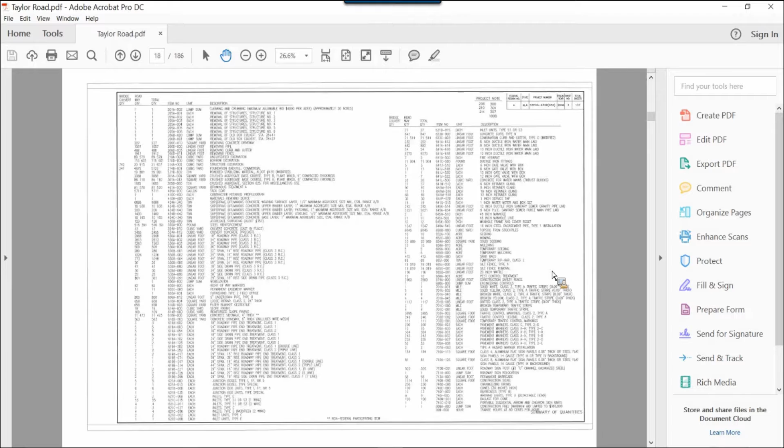I sort of thought about this earlier and kind of realized, we are in the business of communicating, documenting, and conveying design intent. That's what we do as engineers and as designers. All of the sets of plans that we have created and continue to create convey and inform someone else of the intended design. So as we ask ourselves, what is design intent?

If we look at a set of plans, any set of drawings, for a typical section here, for example. So as we zoom in and we take a look at this typical section, it is conveying design intent. And it's conveying design intent really a couple of ways. One is that it is conveying our intent for this particular cross-section or typical section of this roadway. It's conveying it in a relational way.

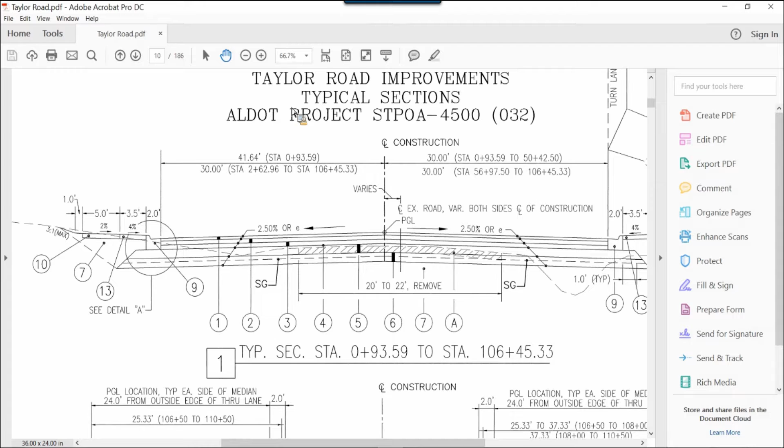It's basically telling us, hey, this edge of pavement is going to be 30 feet from this center line. That's the relationship horizontally that we need to maintain from the center line of this roadway. And at the same time, it's also defining positional definition. If we zoom out, let me scroll down here, bear with me.

We'll move down. If we look at any typical drawing within a plan set, we look at a plan and profile, let's zoom in here. It's also defining, again, locational or positional definition. For example, here we just got a simple call out, station, and offset of that particular right-of-way point.

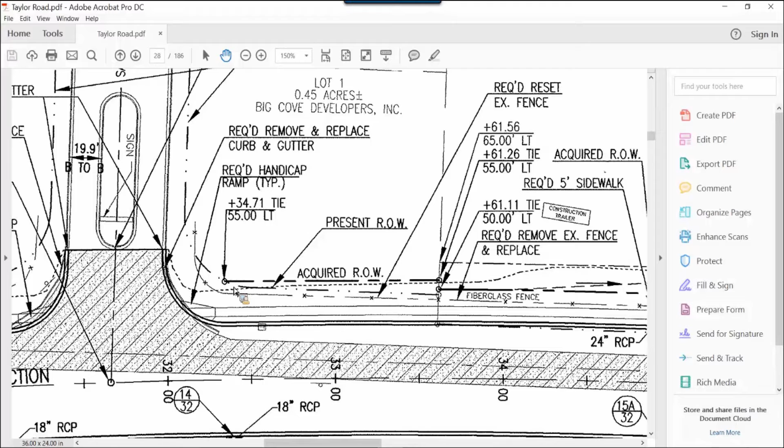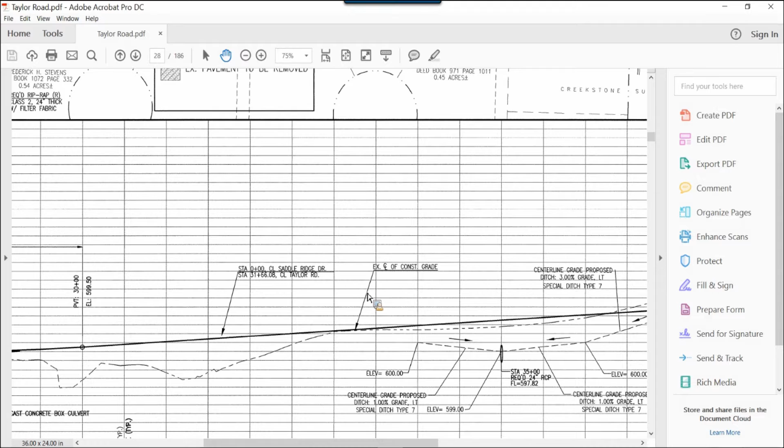Again, when we place a lot of this information in our plans and how we define elements and the way we do things, it's all about position and it's all about relation. You want me to build what, where, in my simplistic terminology. So when we think about design intent in the form of the plans and the way we've conveyed it in the past, it does sort of come down to relational awareness and rules that define where something is and how it interacts with other elements.

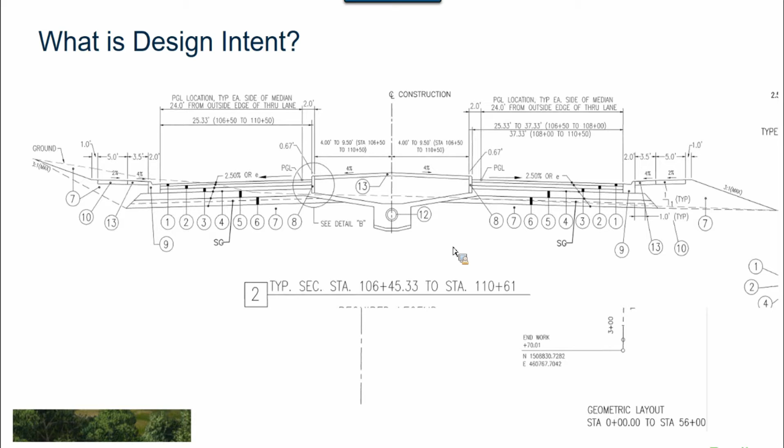Now, what does that have to do with OpenRoads Designer? Well, OpenRoads Designer takes that thought process and really that fundamental concept of everything that we do when it comes to defining our projects and setting the scope, and defining that intent for each and every design. It takes that type of mentality and places it within the software.

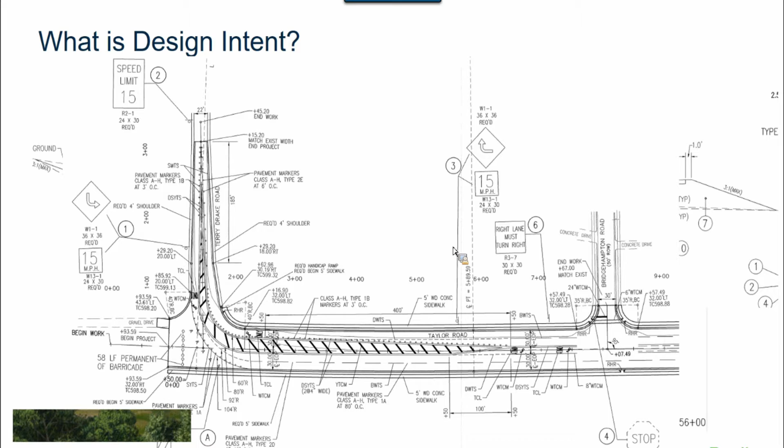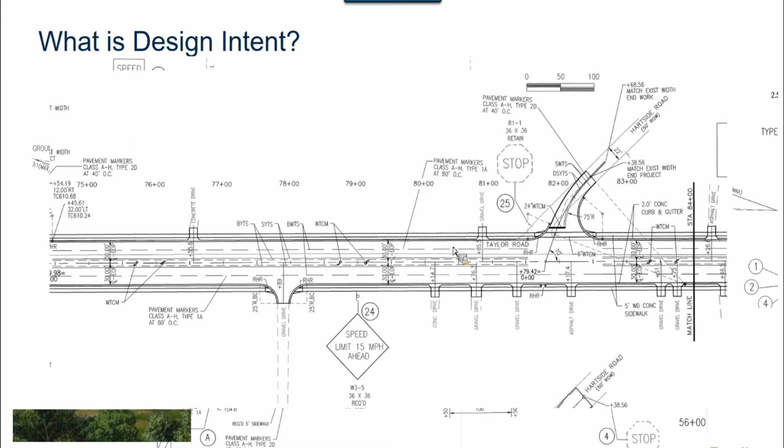And it gives us the ability to define elements and build rules and relationships directly into our elements as we design. So as we create graphical elements with an offset of 12 feet or 24 feet, or we create a radius of an element of 150 feet, it remembers what it was and how you created it. Now the impact of that has some distinct implications. So why should I care that elements within my design model remember how they were created?

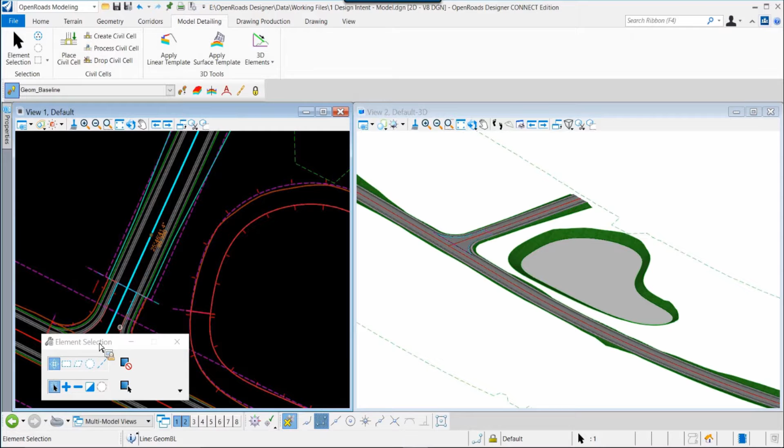Well, there's a couple of things to note. And here's just an overall example. So within OpenRoads Designer, and you may have seen these types of demonstrations before, here's a basic T intersection with a little short stub out of a roadway. Now, in OpenRoads Designer, as we move elements around, you'll notice that the model, the graphics, all of the interconnected elements move with it.

So as I need to just modify that intersection, and I slide it up along the mainline corridor, you'll note that everything's going to move and change with it. Now, simply being able to do that is a result of rules and relationships, of OpenRoads Designer remembering how I created the horizontal alignment for this secondary road. It remembers, of course, what roadway template was applied to it. It would remember how the vertical alignment has been created.

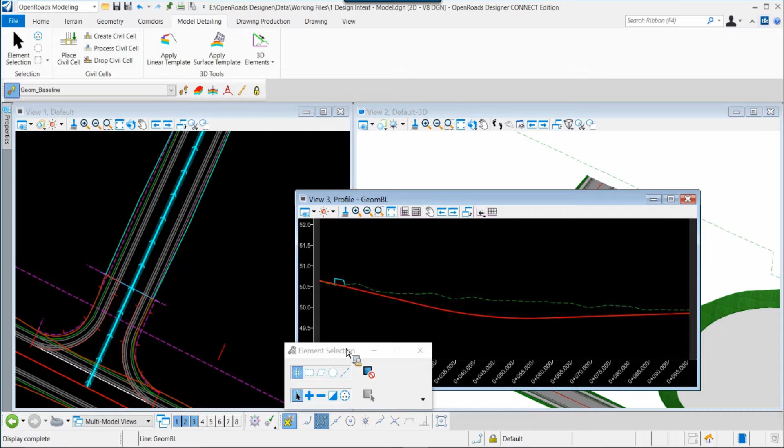So, for example, if I open up the profile of this secondary road, and bear with me while I rearrange the views just a little bit here. Now, these are the subtle details that we all are concerned about. The devil's in the details. And so, for example, it's one thing to just move this intersection up or down, but I need to be aware. I need to know that my intent is maintained when I make modifications in my design.

And that fundamentally is the benefit of having, quote, design intent, or capturing and storing rules and relationships all the way through your design process, which OpenRoads Designer provides you, is that you can be confident, you can know that I created it this way, it's going to maintain that relationship until I change it, even when I jiggle something to the left or the right or north or south of it.

So in this example, I moved that road, we saw the model update, but you may ask yourself, well, wait a minute, there's some details to that. What happened to the vertical? How did the profile know what to do? How did it know how to maintain a certain slope or a certain cross slope, or how did it tie into the roadway? So first of all, as you talk about design intent, every element in OpenRoads, as you create it through the OpenRoads tools, has some form of design intent.

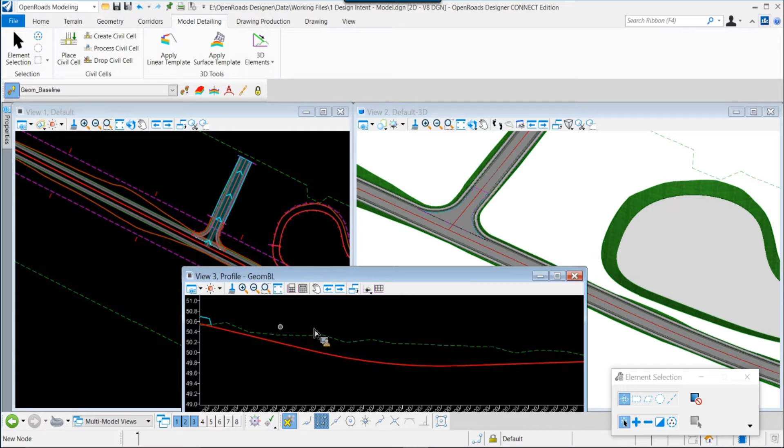Now that design intent could be a slope, 2.26%. It could be a horizontal distance. It could be a direction, north 45 degrees east, whatever. It could be a snap. It could be that I have singularly and definitively snapped the end of this line to this point, and it remembers that, okay? But in this example, notice what happens in the profile view as I just grab the horizontal, and let me just move it along the roadway and stop for a second.

So when we look at the details, specifically the profile details of this, you'll notice that that profile has a defined relationship to, number one, the mainline corridor and the cross slope of the mainline corridor. Notice how as I move that along the main line, that profile knows to match the cross slope of the roadway. Okay? And that is fundamentally what design intent gives us, and the ability to do that.

Okay? So in a nutshell, or at least a straightforward, simplistic, direct example, move that down, let's pull that up there. That is the benefit and the advantage when we say design intent. What we are fundamentally meaning is that I have designed horizontal, vertical, three-dimensional, all of my elements within my OpenRoads model have been defined with rules and relationships, so that as I make modifications, those rules and relationships are maintained.

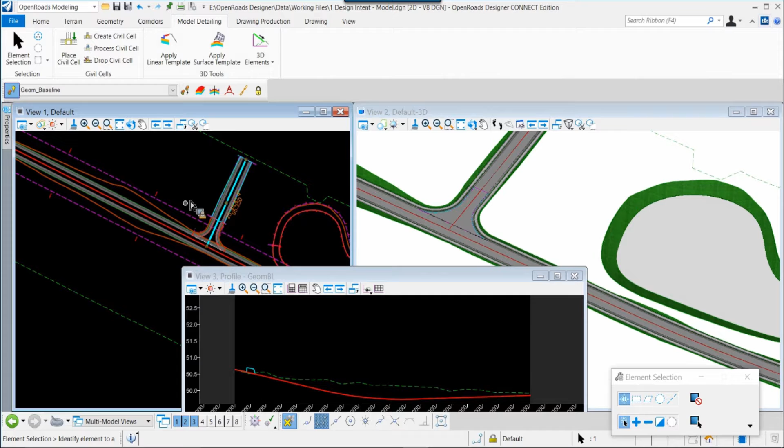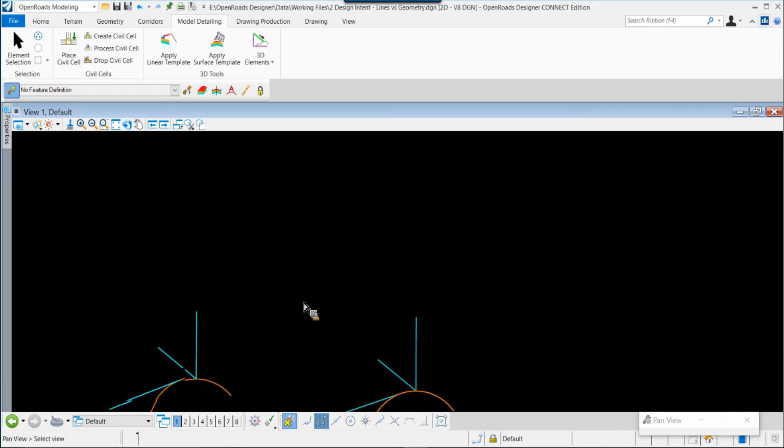All right, so let's take a look. There's a few other questions. If this is what design intent is, how do I implement it? What really is going on there? So bear with me. Let me change drawings here. Now, what I want to do first of all is to just give you a quick comparison to the way we have traditionally done things, and compare that to taking advantage of OpenRoads rules-based geometry.

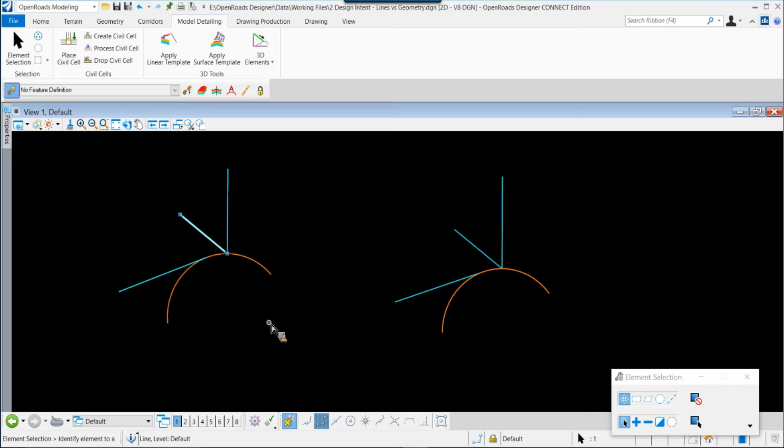Now, this is a bit of a strange drawing, I'll admit that. On the left-hand side, we have nothing but just some graphics. These are simply lines placed using our drawing tools. And you'll notice they have no real information on them other than a beginning and an end point. So there is a distinct difference between OpenRoads geometry and just graphics placed in a file.

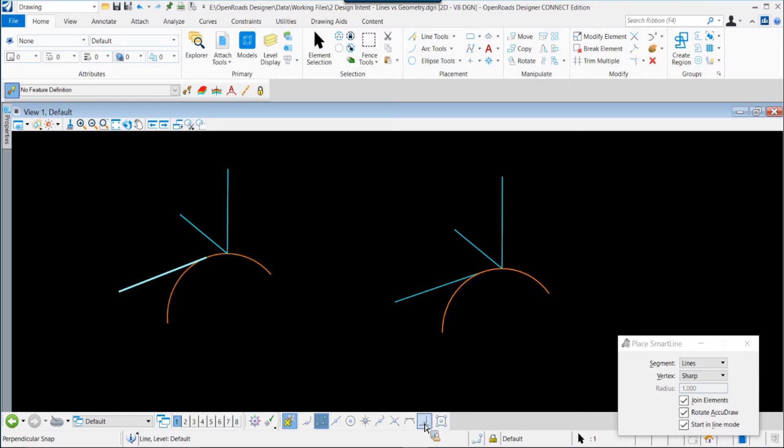So as a quick example, if I want to just place a line, and we'll do something very simple, and you probably have all seen this if you joined in the other presentations here. I can turn on, I'll do a perpendicular snap, and just place a line.

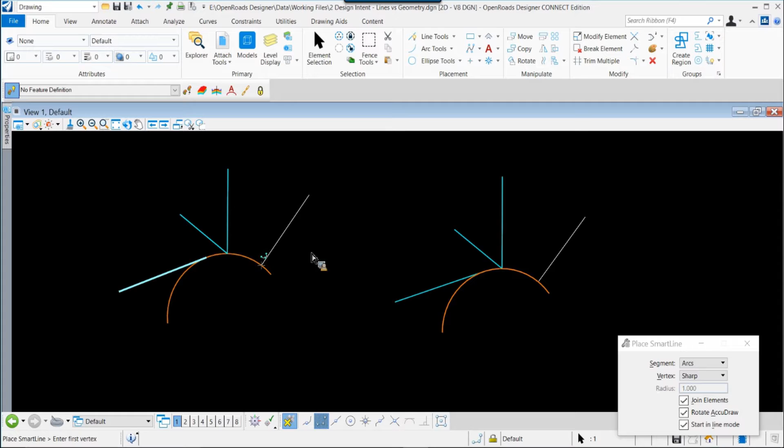Okay? And I can do the same, let's just do the same over here. Right? Now, we have that line. It's there. It was placed perpendicularly to this arc. But now what happens when that arc is modified? Nothing. That line that I placed has no relationship to that arc other than what I defined when I placed it at that moment. It has no legitimate ability to update.

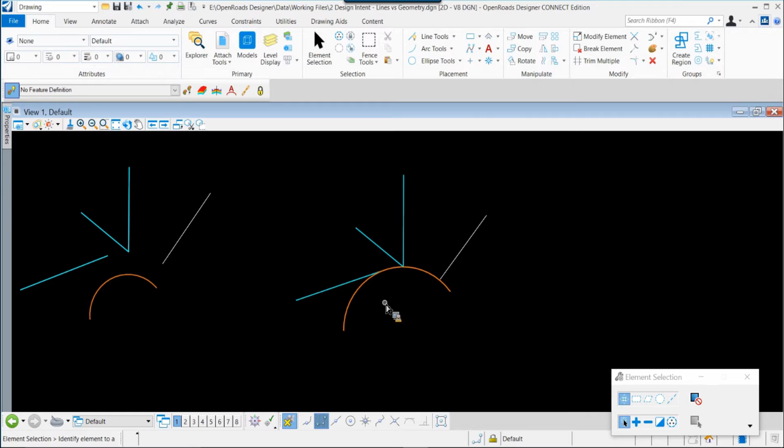And that's what design intent is intended for. It is intended to define and give you a mechanism so that all updates have a legitimate, definable and precise way that they update. So let's look at this other example. This is geometry created using the OpenRoads geometry tools. So we have the same drawing, the same graphical elements over here on the right-hand side.

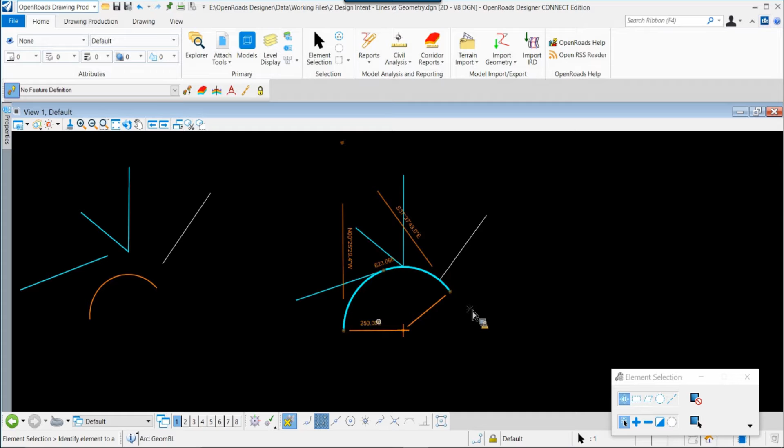You notice as I select that element, it is defined. There's a radius on it. There's a bearing, a distance. You know, the geometry is defined. So you could define this as line work on the left, geometry on the right. And the geometry on the right has rules and relationships to it.

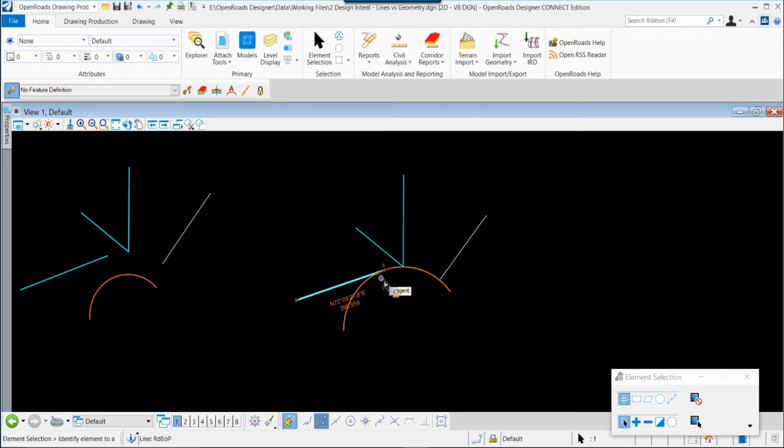Now, as I select that horizontal element, you notice a couple of things. We see the bearing, we see the distance. You'll also see this little glyph here, noting that that element was created with a tangential definition to that arc. And the same is true of all these other elements. There was a relational definition built into those elements when they were created.

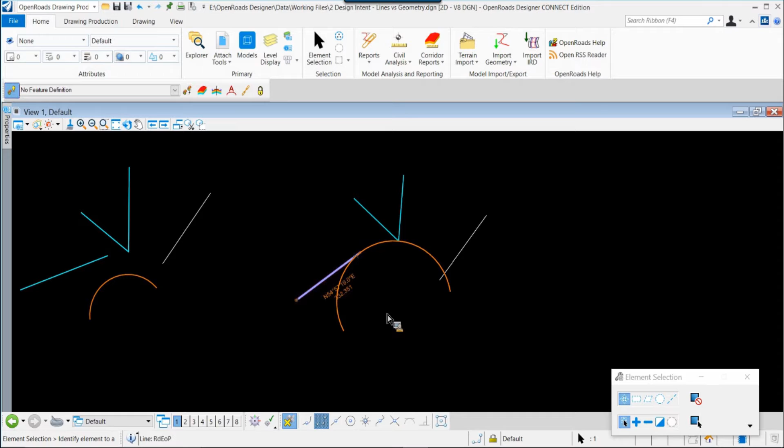Now, what's the advantage of that? The advantage of that is, very simply, if I make a modification, notice what happens to those graphics. As I make modifications to any of those elements, those relationships are maintained. You'll notice if I click on it, it's still tangent to the arc. This element's still perpendicular to the arc. And this element still maintains a 200-foot offset from that intersection point.

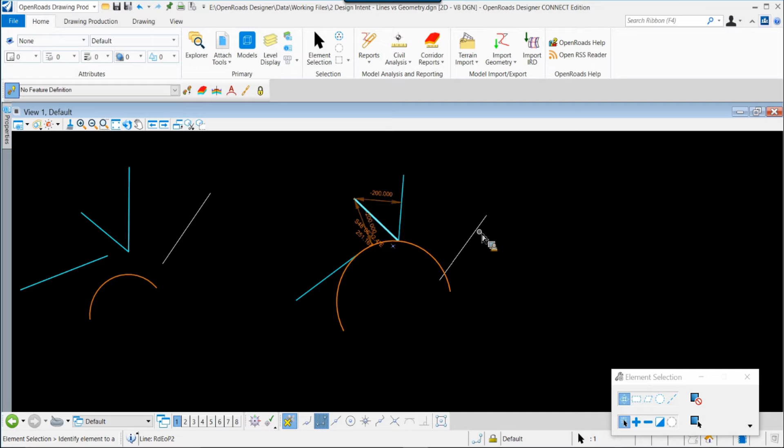And that, again, is the advantage, and that's fundamentally what design intent and rules and relational geometry in OpenRoads Designer is all about. It's to give you control as a designer to know that I made a change, I created it this way, it remembered how I created it, and I can maintain those relationships. All right? So that's kind of the difference between line work versus geometry.

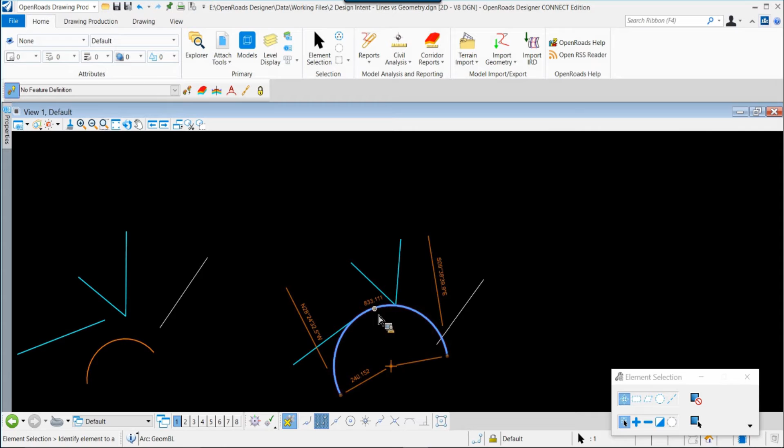Now, I'm going to take this a step farther here and just evolve a little bit. The benefit of having design intent is clearly seen graphically. It's easy to see that if I move this around, I see the line work update and the lines change. Okay? Imagine now we take that a step farther and we think about drawing and modeling.

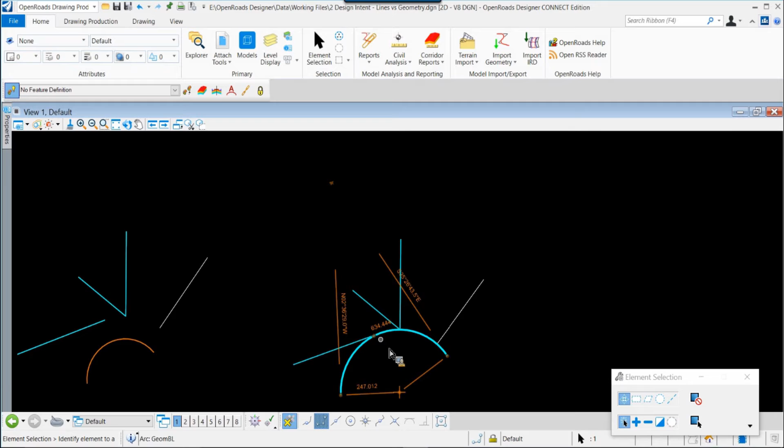So the geometry, an intelligent geometry, which is the foundation from which we're going to model, if that's intelligent and relational and rules-based, makes our modeling and making changes and designing within a model much more effective, right? So ultimately, the geometry, horizontally and vertically, and the relational interaction of that data is fundamentally how OpenRoads Designer knows how to dynamically model, change and update things.

All right, so a couple of points I wanted to make as well. Let me change back here so I can give you a couple of points I want to make. Now, I want to expand our definition of rules and relationships here a little bit. Inside of OpenRoads Designer, rules and relationships are captured and maintained throughout OpenRoads Designer.

Now, we're looking at geometry at this point, but the same is true in the horizontal geometry and vertical geometry. Your design intent is captured and conveyed in a roadway template with the cross slopes that you define, the depth of the ditch that you define, the elevation where you go to a 2-to-1 slope when the fill's elevation's too high. All of that is design intent, and it all combines and intersects within an OpenRoads Designer model to give you the dynamic modeling that we see.

Now, rules and relationships. How can rules and relationships be created and stored when it comes to creating my design model and my geometry or anything else in OpenRoads Designer?

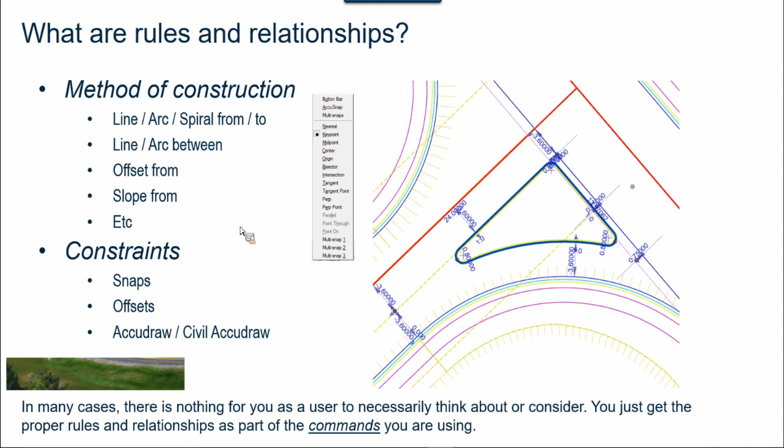Well, you can see graphically here on the screen when we use the geometry commands in OpenRoads Designer, we will be creating rules and relationships on elements as we create them. So the first method for imparting rules or relationships into your OpenRoads design is simply using OpenRoads tools. And we'll take a look at that in just a second.

But I boiled this down to three main ways that rules and relationships are created when it comes to OpenRoads Designer. The first is, again, just simply using an OpenRoads tool. Placing an arc between elements, that rules and defines that arc between those two known elements. So where the two tangents on either side of the arc go, that arc knows to follow. It's a child of a couple of parents, and whatever they do, it's going to adjust automatically.

So we use OpenRoads tools to build relationships, and we can use snaps, just simple MicroStation snaps like an intersection snap, a near point snap, or an endpoint snap. Those impart relationships and rules as well to elements as we create them. Also, Civil AccuDraw. Civil AccuDraw can be used to define positional and relational awareness of elements when we create them. Okay? So let's go back to our example here and take a look at what that actually means.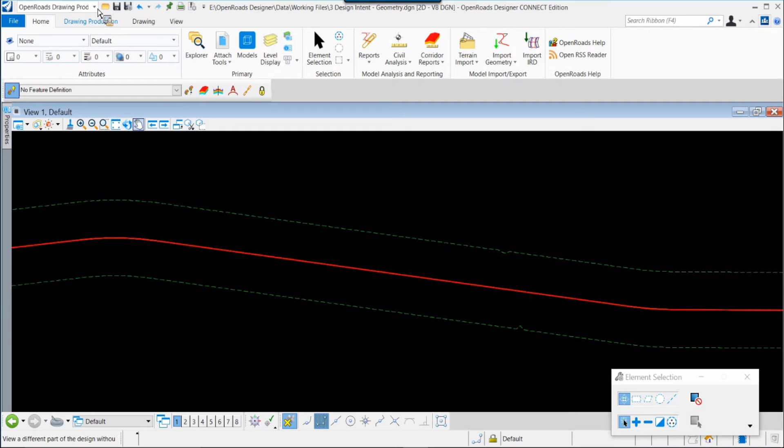All right. So let's go through a couple of these exercises. As I mentioned, three main ways to define some type of design intent. So if we go back again, we take a look at something simple like our intersection. I'm going to go to the OpenRoads modeling tools, and I'm just going to place some geometry, and quickly put a definition on it.

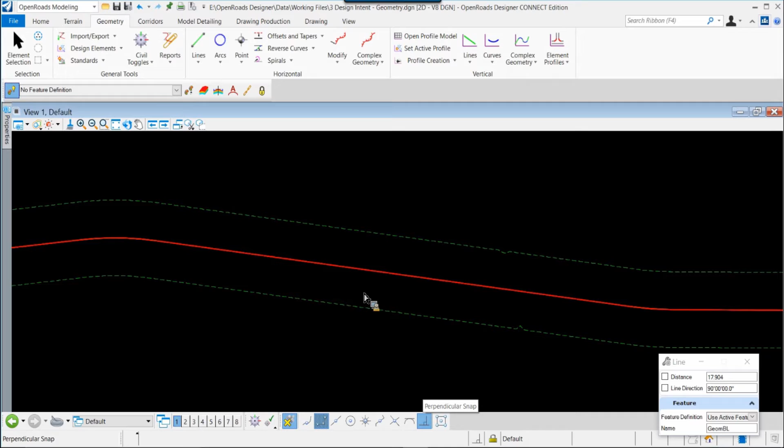Now I'm thinking in my brain, how do I want this center line of the secondary road to interact with my main line? And again, a very simple example is I want that to be perpendicular to the main line. And now I'm just using a simple perpendicular MicroStation snap, and I'm going to place that. So there is my center line of my secondary road.

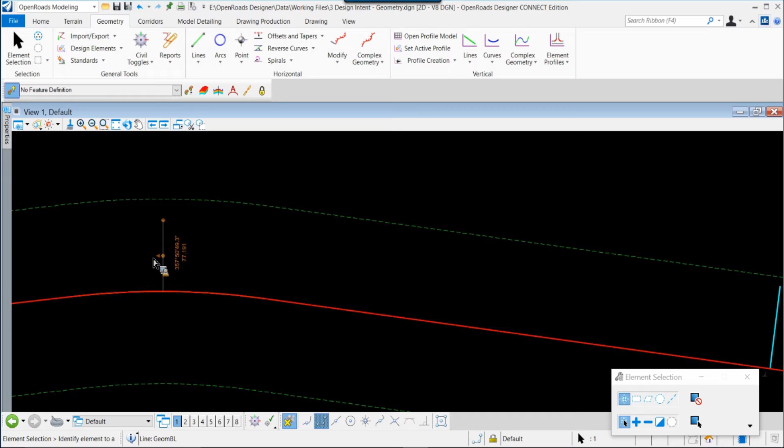And you note, just by highlighting it, I can see that it has a relationship to maintain a perpendicular relationship to that alignment. So let's test that out. Let's see if that's true. So we pull it up and we move around the arc, and we can verify. It is remembering that it's supposed to be perpendicular to that baseline. So that's great. It remembers. That's what we wanted. Let's pull it back over here.

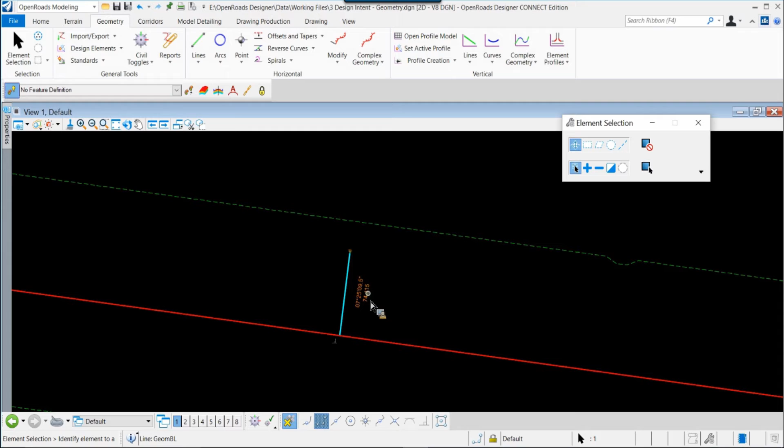And let's continue on and think through this a little bit. So, number one, we built a very simple alignment. We have imparted our design intent in that we want it to maintain a perpendicular 90-degree angle to the baseline. Let's look at some other things that we might want to do. If we go up to the horizontal geometry tools, maybe we just want to lay out a simple left and right edge of pavement.

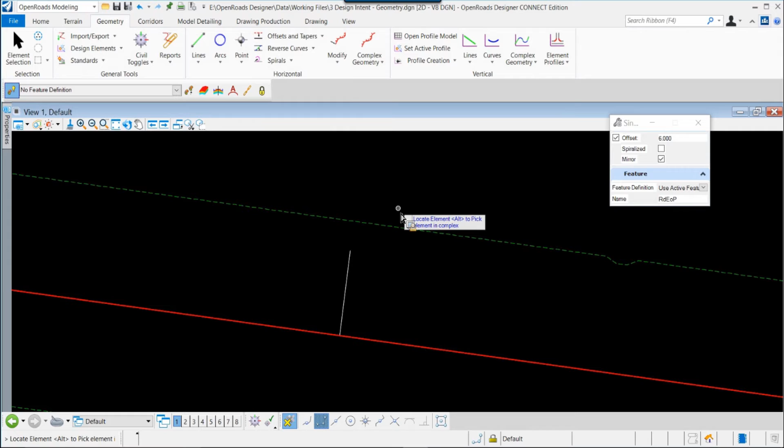So I'm using just the OpenRoads tools here. And let's note what happens. So I'm just going to do a single offset along the entire length of the alignment. I can pick that. We can make the offset whatever we want it to be. I think this file is actually metric, so we'll leave it there. All right, so I'm building a relationship to that main line alignment of 6 meters. Right, and then I'm going to mirror it, so I'll do the other side as well.

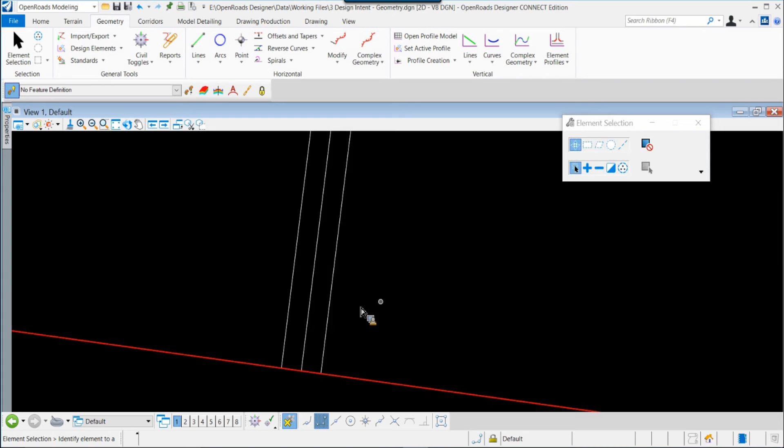All right, so here's the key. Notice what happens when I select that element. That element now has been imparted or has been given a relationship to the main line.

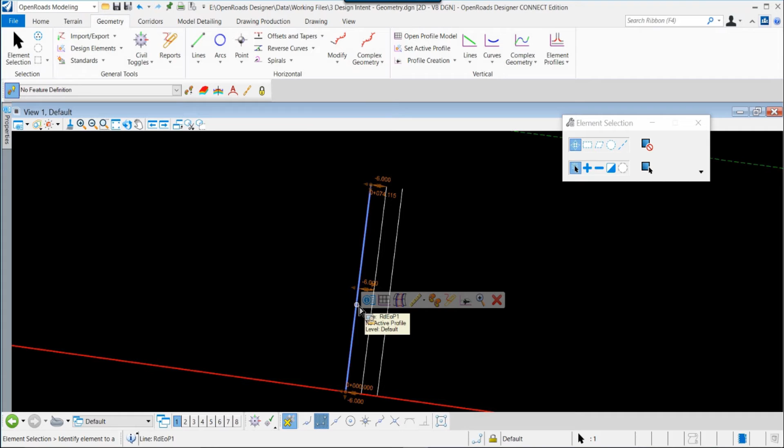So as we create elements in OpenRoads Designer, we're not just creating graphics. Our decisions aren't lost the moment we make them and place the element and walk away and move to something else. Our decisions are maintained, which, again, if you take the long-term view of what we are doing as we design in OpenRoads Designer, we are actually increasing the value of the data that we create.

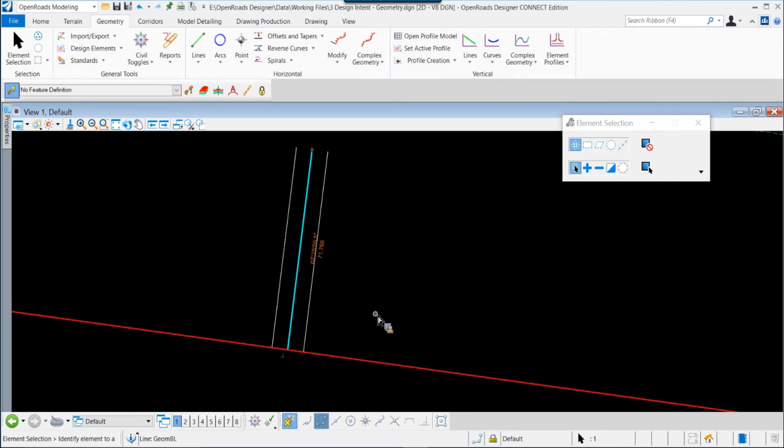So those edges of pavement now aren't going to be wasted if I need to make a modification to my center line. That effort's not been wasted. Okay? It's all about being efficient. It's all about making design decisions, capturing those so that I can reuse them over and over and over again. All right? So we are increasing the value of our work and minimizing the rework and increasing the efficiency down long term.

All right, so 30 minutes just isn't what it used to be.

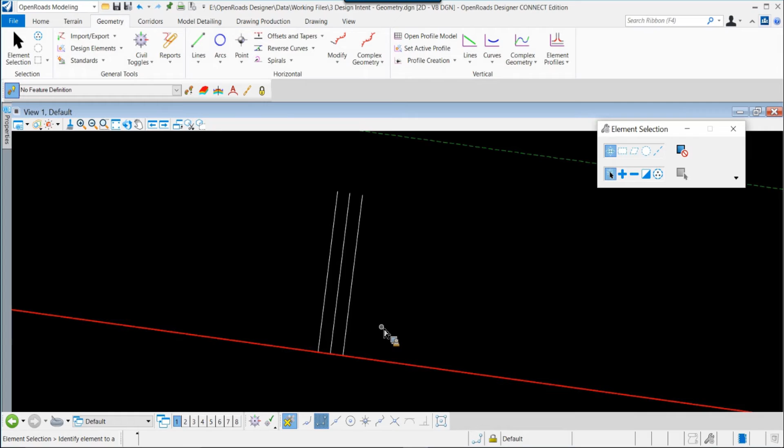So we have used a MicroStation snap just to simply build a perpendicular relationship, okay? And here's the key thing I want you to take away out of this presentation. I want you to understand that in OpenRoads Designer, first of all, we are, again, enhancing the value of your work, and we're giving you the mechanism to maintain the value of it. Again, if this had just been graphics and I needed to move the intersection, we all know what would have happened. We would have had to recreate every edge of pavement.

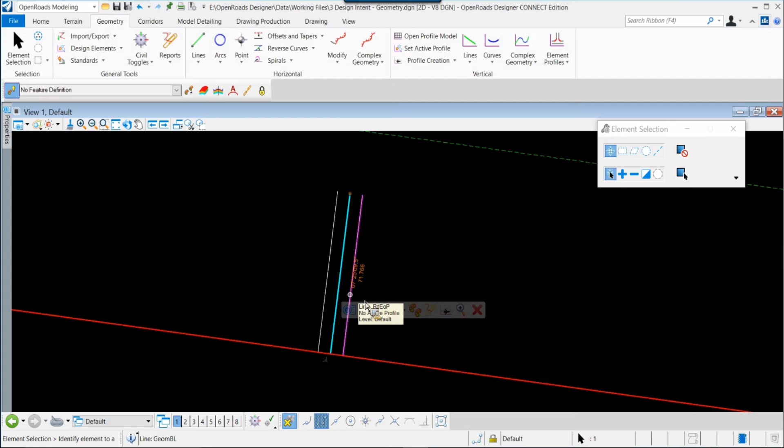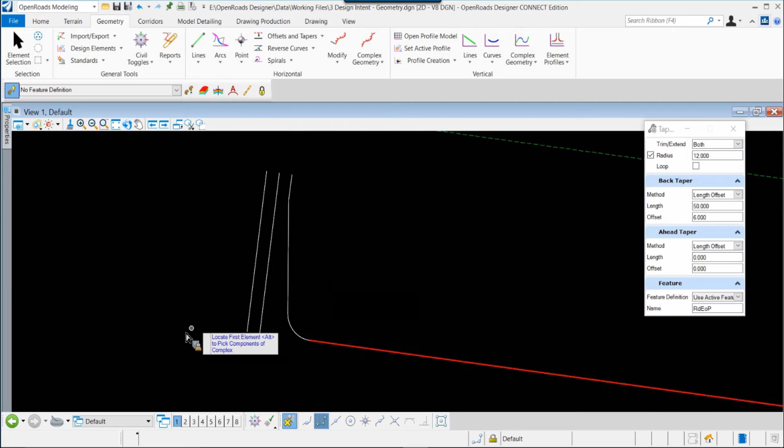Now take this a step farther and let's put an arc in here. So we'll do an arc between elements. Oh, let's do this. Let's do a taper, and I'm just going to put it in here kind of quickly. We'll go here, and now we have that information. We're placing it, and I'll just click. We'll trim both elements and let that process. So we just made another design decision, and now we have put that in our design.

We do the same on the other side. Again, I'm just kind of doing this quickly, just for example. Click through the prompts, and so now we have, it's not maybe exactly what we were shooting for, but now we have our intersection. And again, this has been defined with rules and relationships between all these elements.

So again, on Tuesday I created these graphics, and then on Thursday, for whatever reason, we need to make a modification. What would happen in the past? We all know what would happen. We would have to recreate all those elements. Now, again, time is kind of moving here. All those elements are modifiable.

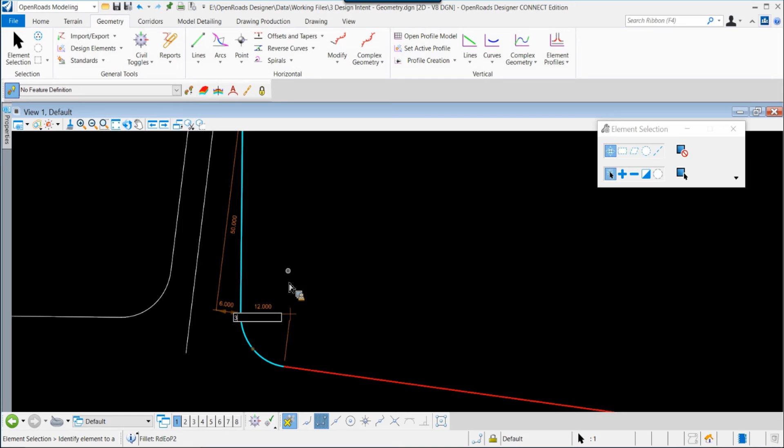Remember, I put a taper and an arc and a taper in. So you have the ability to modify these things after placement. So if you need to make changes to any of those elements, you can do that directly. And again, the key is to maintain the value of the effort that you've already put in when you're creating, not just graphics, okay? Let's take this one step farther and look at, again, the long-term view.

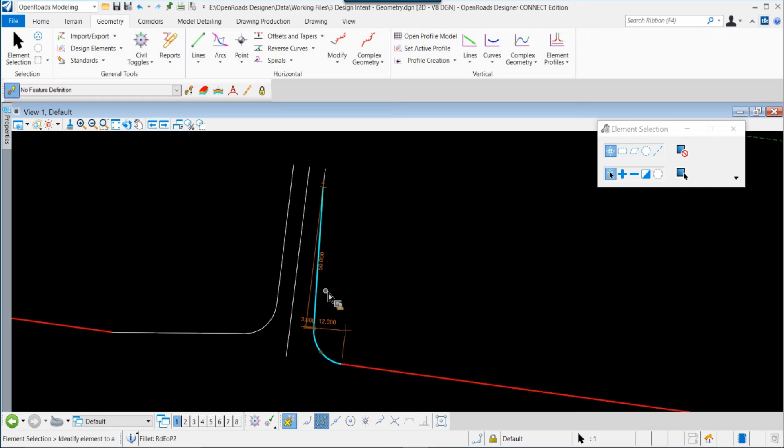Ultimately, with OpenRoads Designer, it is about modeling. It's about creating three-dimensional design models. So we're looking generally at geometry, which is kind of the foundation that we all work from. This is the foundation from which our 3D data is going to be built.

But if we take this a step farther and we begin to build a corridor on it, or we apply a linear template to it, those are being built in a relationship to each of these individual elements. Okay? So as those elements move, the pavement, the curb gutter, the sidewalks, all the other elements move with it, just as we saw in the first example.

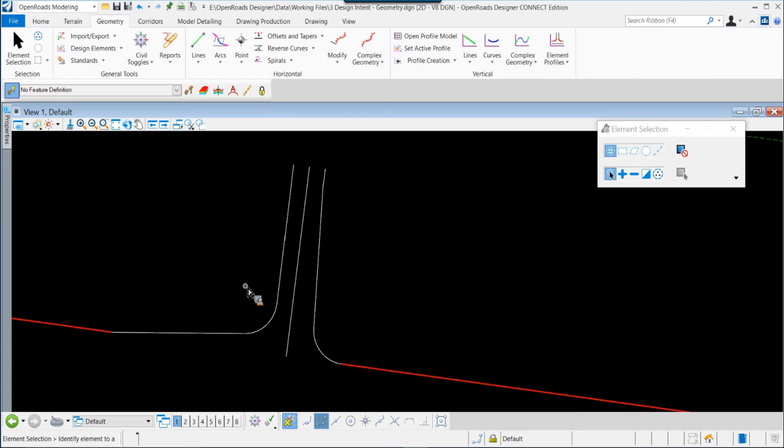So, the takeaways. Number one, what is design intent? And what is design intent in OpenRoads Designer? Fundamentally, and at a very basic level, it is capturing the rules and the relationships that you create as you build geometry, and maintaining that throughout the design process. Okay? That fundamentally is what design intent is.

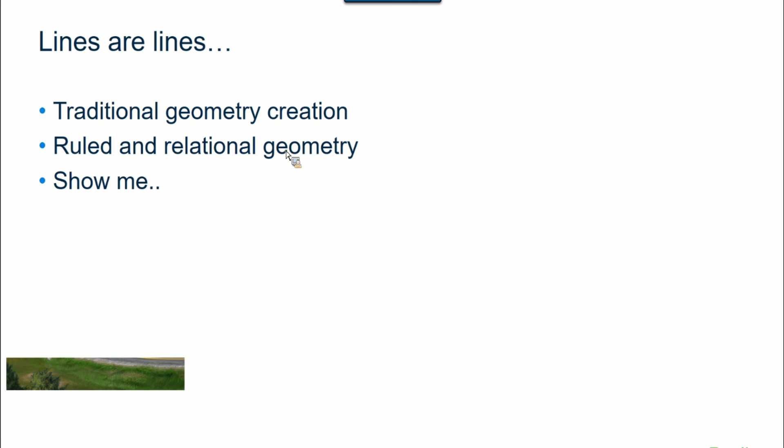You could replace the term design intent with simply saying it's ruled and relational geometry. That's what we're talking about in OpenRoads Designer. Now, it's not just geometry, it is throughout the product. And I didn't quite have time to show this, but if you snap or you want to interact with other elements, well, we did actually.

If we go back and look at our first model, let's go here. If we go back and look at that first model, remember, it's not just horizontal geometry or vertical geometry. The rules and the relationships are the interaction of all of the design elements in our projects.

So as we see here, it's not just geometric interaction, it's interaction of the geometry with the roadway corridor in this case. Okay? It can be even defined if I modify that element. Let's just for a minute watch this. Now I'm going to redefine that endpoint, and what I'm going to do, I'm going to snap that to the ground. Right? So I am using a snap, and we'll just place this against the terrain model.

Now at this point, I am adjusting that vertical and going to redefine it a little bit. All right? Notice that the icon updated. Now what does that mean to my design? And now this is at the heart of design intent and rules and relationships, and how in practice you can apply it and take advantage of it.

I modified that endpoint now. It had a previous rule to go to a certain elevation at a certain station and stop. Now I've defined it to simply follow the terrain. So what happens when I, again, modify the horizontal and move that around? Notice what that endpoint now is doing. It's following the ground. That is its rule. Follow the ground wherever the ground goes.

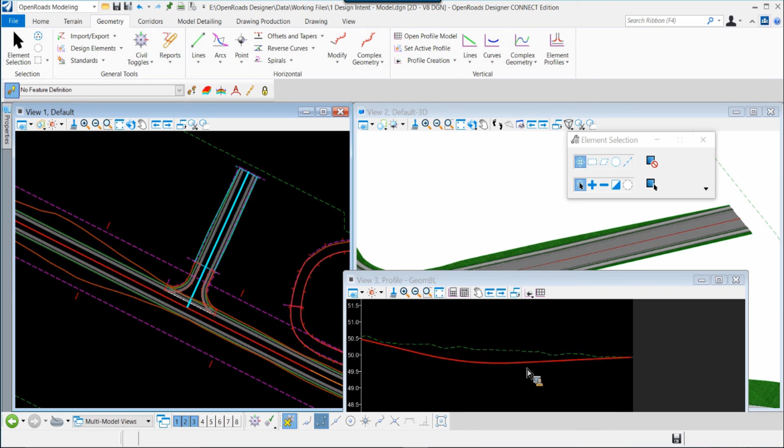All right? Now, again, that is, in practice, fundamentally, what design intent and rules and relationships are all about. Okay? It's being able to define how something is designed, what it relates to, how it relates to it.

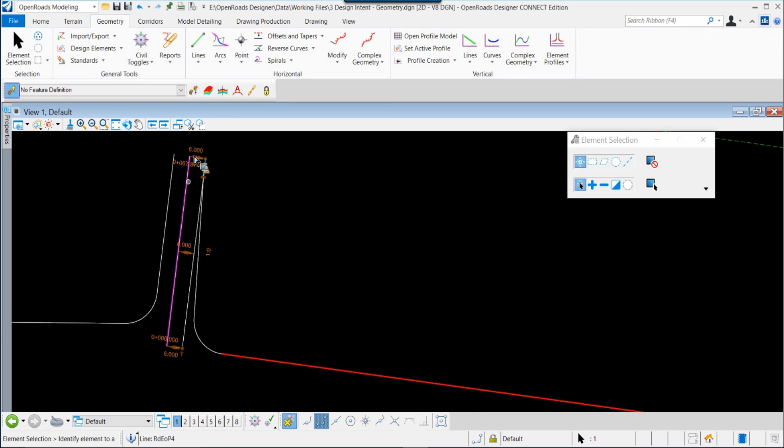One final thing. Let's go here, and I want to show you one last thing. I didn't quite get to show this. I mentioned there were really three ways that rules and relationships are created in Elements. We saw using OpenRoads tools to create relationships. We still have the relationship back to the baseline that we defined when we offset left and right. So we've got rules where we built a relationship here. We still have the snap rule telling that roadway intersection to be perpendicular to the main line.

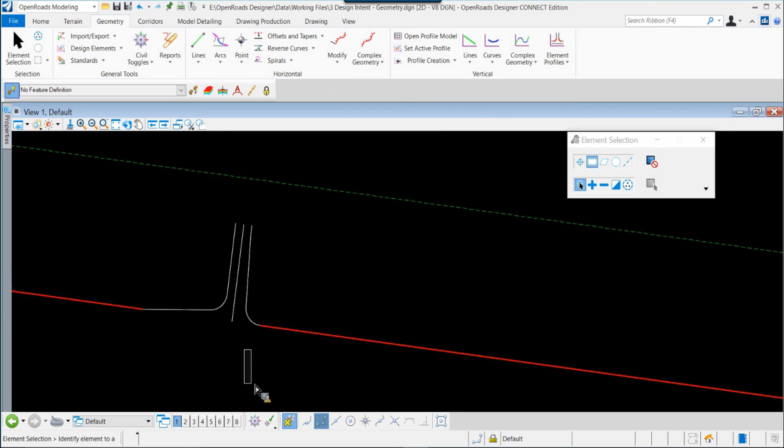And then I mentioned Civil AccuDraw. How does Civil AccuDraw relate? So let's take a look at that before we finish up. All right, so I'm pulling out the Civil AccuDraw toolbar. And then just as an example, we're going to create what would be a right-of-way. So I'm going to change the feature definition here so that we'll get a different line style. And then we will place a line. I'm going to activate Civil AccuDraw. Place a line, and we're going to use station and offset as our method.

Now, basically, this is the explanation: every one of these options for locating elements builds a rule or a relationship on that element when you place it. So I'm going to build a relationship into my line based off station and offset. That's what I'm actually doing. I'm drawing the line, but I'm also building that intelligence into it. So let's place a line. I've got the station and the offset selected. You'll notice my little heads-up toolbar changes.

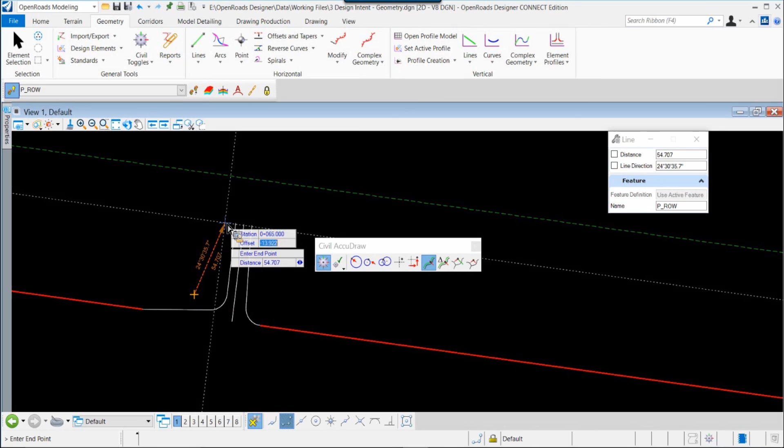And now I'm going to click the O button just to define what's the baseline I'm working from. All right? And so now I'm picking up the station and the offset. Now, of course, I can just graphically pick something, or I could key something in. So we'll set the station at that and the offset to minus 30, right? And I've located that first point. Now let's just create a taper going up here. We'll go to station, and let's let the offset be minus 15. All right, that's simple, straightforward.

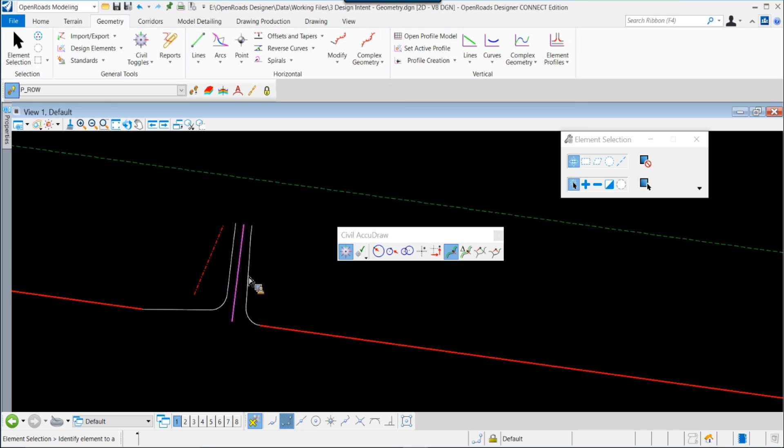Notice the rules and relationships. By creating that line in that way, using Civil AccuDraw, defining the stations, defining the offset, I've now built that relationship into that element. Sometimes I've said I programmed that element how I want it to act. With that being said, if I now move that element along the roadway, what happens to the elements that I have built with a relationship to it?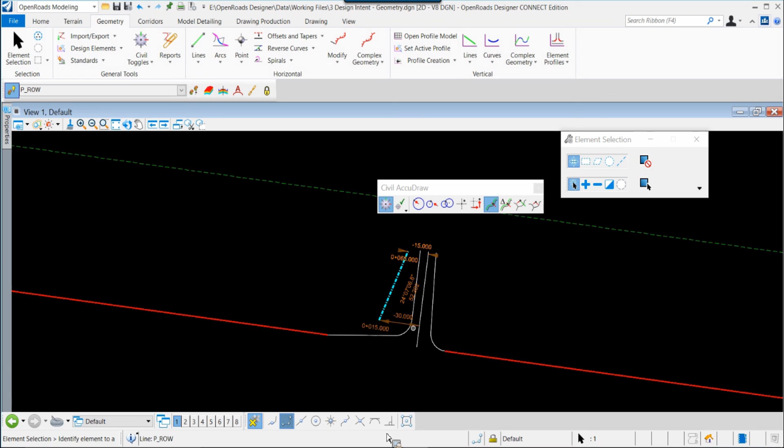So in this very simple example, we used MicroStation snaps and a perpendicular snap. We used the OpenRoads tools, and we used Civil AccuDraw, in addition to the OpenRoads tools, to build that intelligence into those elements.